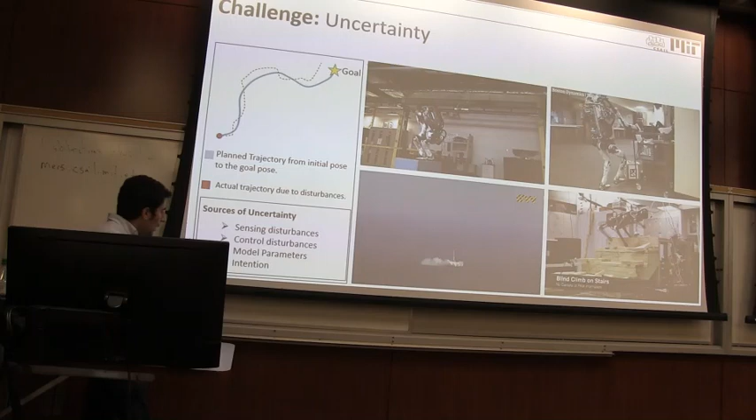Even if we have perfect information about the environment, even if we have perfect sensors and precise models for robots, the intentions of other players are uncertain to us. For example, when we are planning for autonomous vehicles, the intentions of other vehicles are uncertain. Their future behavior, their future actions are uncertain to us. So we need to deal with these kinds of uncertainties when we are planning for robots and autonomous systems.

In general, we have two sets of techniques to deal with uncertainties. First, robust approaches, and next, risk-bounded, or in general, risk-aware techniques. In robust approaches, we need to look at the uncertainty set. We need to look at the range of uncertainty and make sure that the obtained plan is valid for all possible values of the uncertainties. Let's see how it works.

For example, consider this simple example. In here, the goal is to drive the robot to the goal region, and we have a TurtleBot that plays the role of obstacle. In this problem, we don't have any uncertainties, so we can call any path planning algorithms like RRT star, or PRM, or trajectory optimization techniques to construct a path to the goal.

Now, let's look at the next scenario. In this scenario, the TurtleBot plays the role of a moving obstacle, and its location is uncertain. We only know that the robot moves between these two given points in the room. Now, to construct the robust path, we need to look at the uncertainty set, which here is the interval that shows the location of the robot.

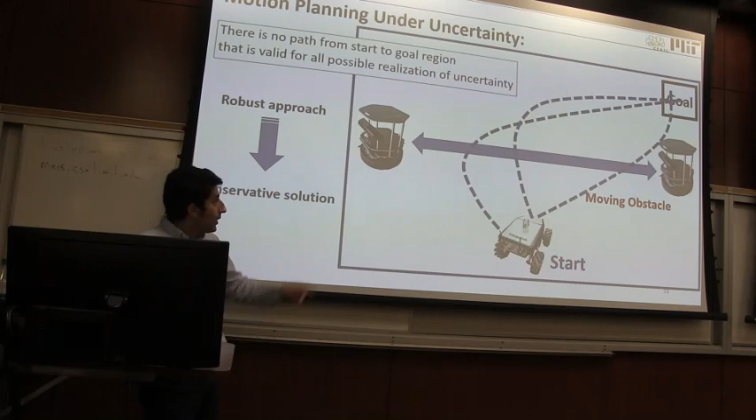So no matter how we construct the path, we can always find a value for the uncertain parameters, or a location for our obstacle that collides with our path. So from the robust techniques point of view, this problem is infeasible. And even worse, if we replace this TurtleBot with a real turtle that takes 10 days to get to this part of the room, still from the robust techniques point of view, this problem is infeasible. Because we can always find a location for our uncertain obstacle that collides with the constructed path.

So in general, robust techniques result in conservative plans and conservative solutions. Now the question is how we can avoid these conservative plans. How should we fix our reasoning?

Include timing? Maybe. I mean, if you can predict.

So we don't have any information about our uncertainties. So if we have a model or time-based model, we can do an exact prediction. But here, we are only given some uncertain set. So to avoid this conservative solution, we are going to use risk-bounded techniques.

So based on risk-bounded techniques, instead of looking at the uncertainty set itself, we are going to look at the frequency of the uncertainty. How frequent is it to observe these obstacles in this part of the room? And frequency of the uncertainty is nothing but the probability distribution of uncertainty.

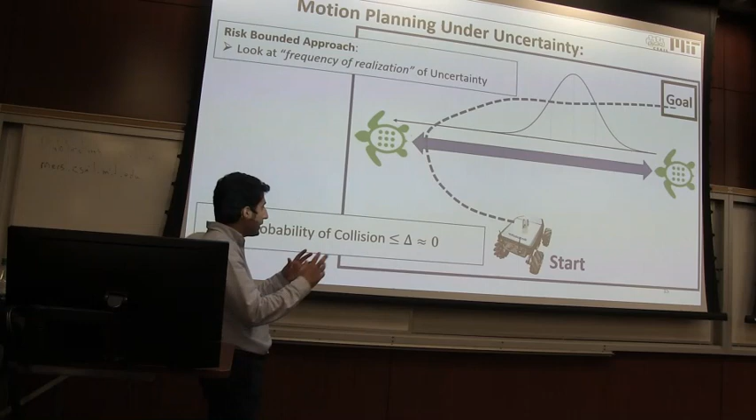In the risk-bounded techniques, we are looking for plans to make sure that the probability of failure is always bounded by a predefined value delta. We call this delta an admissible risk bound. Or equivalently, we are looking for plans whose probability of success is greater than a predefined value 1 minus delta. This is how we want to guarantee success in stochastic frameworks.

So this is the plan, and this plan, for example, is going to work 90% of the time. So probabilistic reasoning and probabilistic guarantees. In general, robust techniques versus risk-bounded techniques is about possibility versus probability. In robust techniques, we either fail or succeed. 0 and 1, we have 2 outcomes.

But on the other hand, in risk-bounded techniques, not only can we succeed or fail, but also we can design the degree of this failure or success. So we receive 0, 1, and whatever is in between. So mathematically speaking, we have more freedom, we have more options to design the plans. And this will result in less conservative plans for our robots.

Okay, so let's now look at the mathematical formulation of the risk-bounded techniques and some challenges that we are going to face. So in risk-bounded motion planning, we are usually given a model of the robot. So we usually have a continuous state space model. In this model, the vector x describes the states of the robot. For example, these states could be location, velocity of a vehicle, or joint angles and angular velocity of a walking robot or a manipulator.

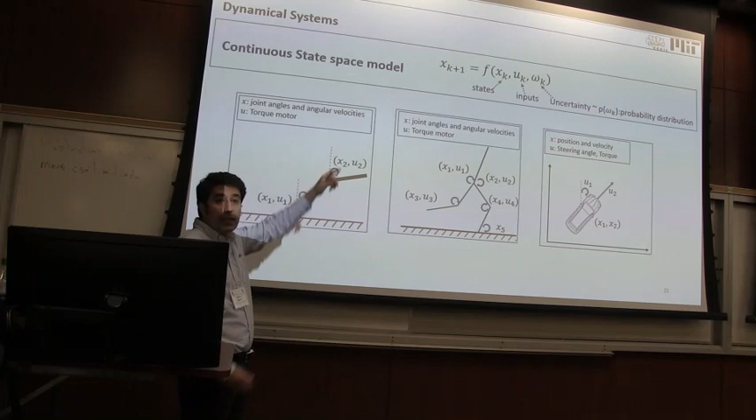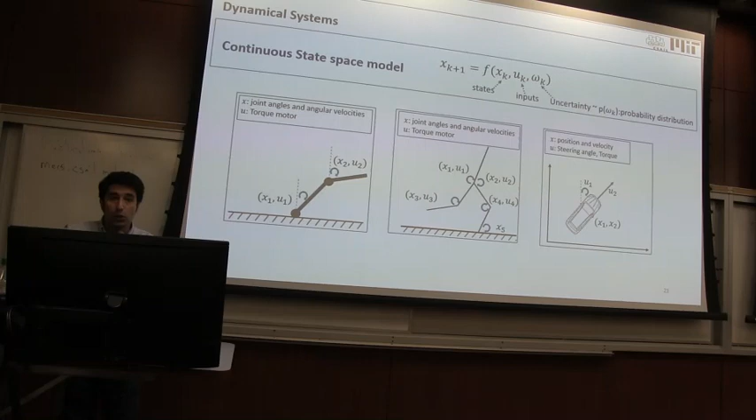So given this model, and given the current states and the current control inputs of the robot, we can predict the states of the system at the next sampling time. We are modeling uncertainty with the uncertain parameter omega. Omega has some probability distribution that captures all disturbances of the system. Also, we are given a description of the safe set or unsafe set in the state space. For example, a description of the obstacles or of the safe regions in the environment.

Now, given this definition, we define risk at time k as the probability of failure, the probability that the states of the system at time k collide with obstacles, or equivalently, the probability that the states of the system at time k don't belong to the safe region.

Now, given these descriptions and the model of the robot, in risk-bounded planning, we are looking for control inputs over a planning horizon T such that we drive the robot from the given location to the goal region in the state space with respect to probabilistic safety constraints. At each time k, the probability of collision, the probability of failure, should be bounded by a predefined value delta k, or equivalently the probability of success at each time k should be greater than a predefined value 1 minus delta k.

In this talk, I assume that we are given this risk bound. This morning, Ono talked about risk allocation techniques to come up with this admissible risk bound. We can apply these techniques and, at each time k, decide this risk bound. But in this talk, I assume that these delta k's are given.

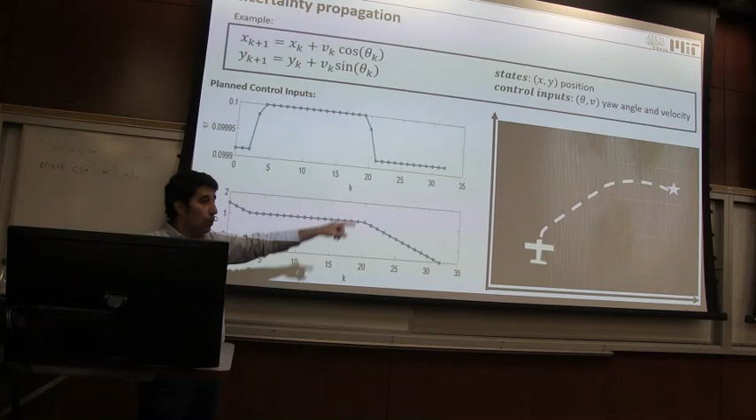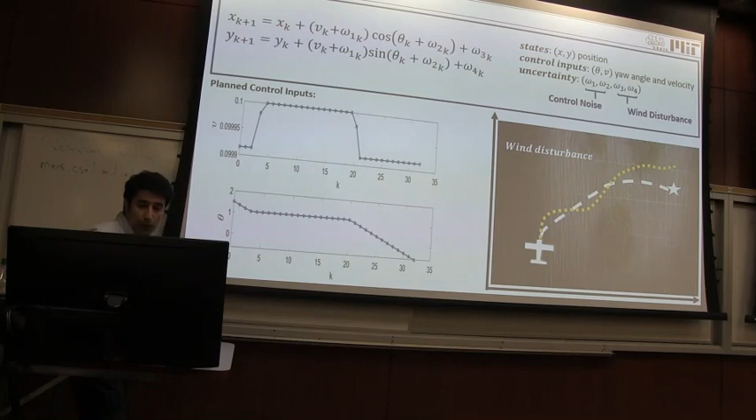Here we are given a nonlinear model of a plane and also nominal trajectories and control inputs. In absence of the uncertainty, if we apply these nominal controllers, the plane will follow the given trajectory to the goal point. Now, in presence of uncertainties, like wind disturbances, the plane is going to deviate from the given nominal trajectory. If we repeat this process over and over again, each time we are going to see different trajectories for the plane. A family of trajectories that represent the location of the plane in the environment.

If we look at these trajectories at different time steps, we are going to see such patterns at each sampling time k. These patterns are different realizations of uncertain states or different realizations of random variables. We can use numerical techniques to find the probability distributions that describe and explain these sample points in the environment. So this shows that since we have probabilistic uncertainties in the dynamics, the states of the dynamics are also probabilistic and have some probability distribution.

And to be able to address risk-bounded planning, we need to model and represent this probability distribution. But in general, this is a challenging problem, so we don't have any analytical solution to find these probability distributions for any arbitrary model of the robot. So the first challenge is uncertainty propagation: how we describe and model this probability distribution of the state at each sampling time k.

The next challenge is estimating the probability of collision. So from the definition of the risk, we need to find this probability that the state at time k collides with the obstacle. And from the definition of probability, we need to deal with these integrals. Here we have a multivariate integral with respect to the probability distribution of states defined over the region of obstacles. Again, in general, we don't have any analytical solution to calculate this integral.

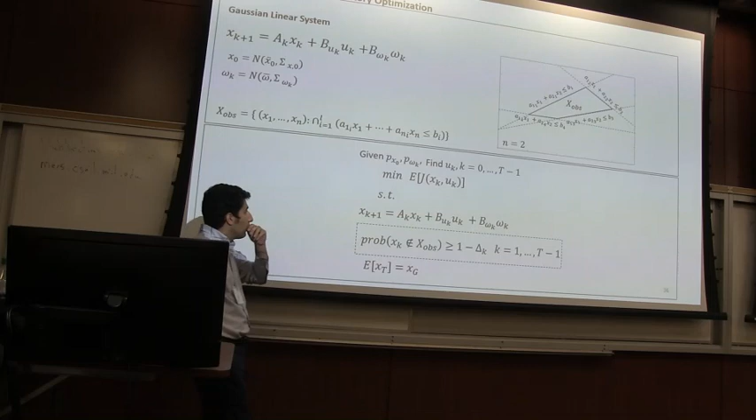So in this problem, we are given a linear dynamics with additive Gaussian uncertainty. Also, the initial distributions are Gaussian. We are also given a linear safety constraint, a linear description of the obstacles or a linear description of the safe region. And we are interested in this problem. We are looking for the controllers to minimize the cost function with respect to this probabilistic safety constraint. At each time k, probability of no collision with the obstacle or probability of remaining in the safe region should be greater than 1 minus delta k.

Now, if we look at this linear system, this Gaussian linear system, at each time k, the states of the system are going to have a normal distribution. We have a linear dynamics with initial Gaussian distribution with a Gaussian additive noise. So if we do the uncertainty propagation and look at the distributions of the states at each time k, we are going to see a normal distribution. Why is this true? Why do we always observe the normal distribution? Any? I mean, linear transformation of a Gaussian remains a Gaussian.

Right, exactly. So sum of two normal random variables results in another normal random variable, and this is exactly what this linear system is doing. At each time, it is summing a bunch of normal random variables and generating another random variable at the next sampling time. So in the uncertainty propagation step, we just need to model the probability distribution with the Gaussian, and we need to only describe their mean and covariance. At each time k, we can write the mean and the covariance of our uncertainties based on the parameters of the dynamical system as here. So these two equations describe the evolution of the mean and the covariance of the probability distribution of the states along the trajectory.

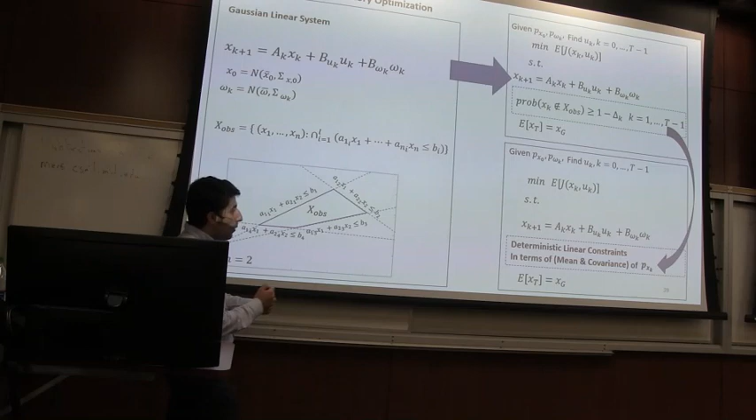Now, in the next step, since we have linear safety constraints, we can replace the chance constraint, probabilistic safety constraint, in terms of a deterministic linear constraint, in terms of mean and the covariance of the probability distributions of states. So as a result, we can transform probabilistic optimization into a deterministic optimization. Here we have a linear constraint, and these new constraints, based on mean and covariance, are going to add some safety margin around the obstacles. The size of the safety margin depends on the covariance of the distribution of the states. So to satisfy this chance constraint at time k, the mean of the probability distribution of the state should remain outside of this safety margin. So this is how we

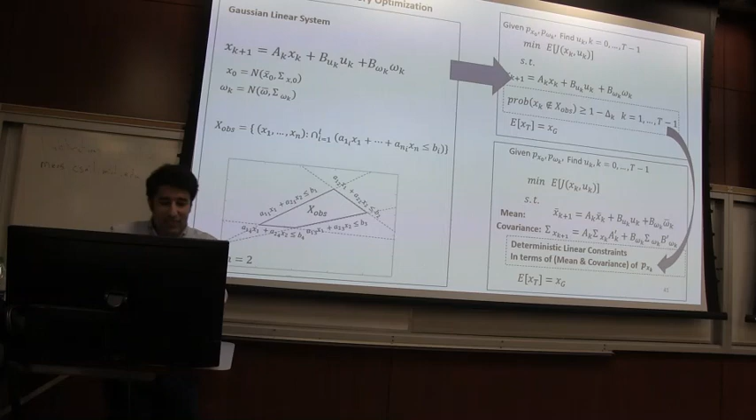assure safety. So the key point here is to describe the probability distribution based on the normal distribution and represent it with mean and covariance, and then replace the chance constraint with a new deterministic constraint in terms of mean and the covariance of the states. This formulation is based on optimization techniques. We can use the key results in different formats. For example, we can come up with risk-bounded RRT star.

So in RRT star, we are looking for a growth tree. So when we are building this tree, at each node, we need to propagate the uncertainties and construct the Gaussian distribution for each node, and then calculate the risk by just looking at the deterministic linear constraint in terms of the mean and the covariance of distribution. And this is how we can find the risk of each node. And by looking at this risk, we can construct risk-bounded paths inside this tree to the goal.

Or another format is risk-bounded PRM. So we can construct a graph in the environment. Then we can propagate the uncertainties, which are normal distributions, along each edge. And then we can assign the risk, probability of collision, for each edge. And then we can call any graph search techniques to construct the risk-bounded paths. For more information about techniques, you can look at the FIRM paper.

Or we can even construct risk-bounded motion primitives. In offline mode, we can design the different maneuvers for the vehicle, and then in real time, we can propagate our uncertainties, which are the families of the normal distribution along each maneuver. And we can calculate the risk by looking at the linear constraint in terms of the mean and the covariance of the distribution, and then pick the right maneuvers that satisfy our risk-bounded constraints.

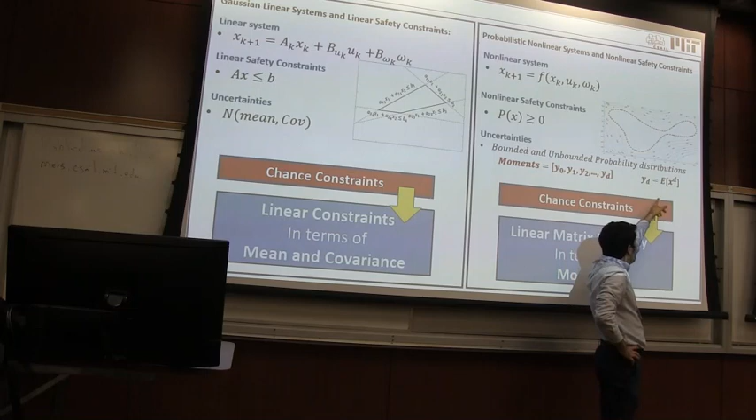Now, in such setup, instead of representing the distribution by only mean and covariance, I'm going to represent the distribution by higher order statistics called moments. So moment of order d of a random variable is defined as expected value of x to the d. So we will see that moment of order 1 and 2 are nothing but the mean and the covariance of the distribution. So here, instead of using mean and covariance, I need to use higher order statistics because we are not going to see a normal distribution because of the nonlinearities.

So to be able to represent arbitrary distributions, I'm going to use a vector of moments. And then, instead of replacing the probabilistic constraints in terms of linear constraint, in terms of mean and the covariance, I'm going to replace the nonlinear probabilistic constraints in terms of linear matrix inequality in terms of the moments. Linear inequalities versus linear matrix inequality. These constraints are also convex, and we can efficiently solve them using convex solvers.

So this is the main overview of the techniques. We are going to represent a distribution by set of moments and then replace the probabilistic constraints with linear matrix inequality. What's the difference between linear and matrix? Yeah, what's that? Yeah, we will see.

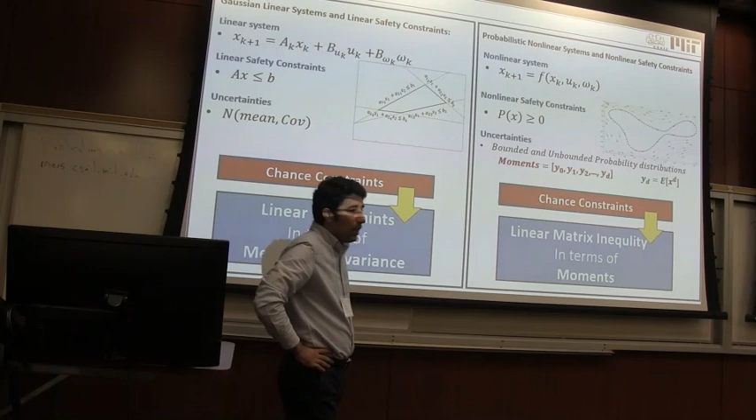So, to be able to address the risk-bounded nonlinear plannings, I'm going to define two general frameworks. One is chance optimization, and the second one is chance constraint optimization. In chance optimization, we are looking for design parameters to maximize the probability of success. So what is success? It comes from the nature of problem. So I only assume that success is a nonlinear function of design parameters and uncertain parameters.

Like, this success could be reaching to the goal region or avoiding obstacles, or even it could be maximizing a profit in a trade. So these formulations are general, and we can reformulate many different problems in different domains as a particular case of these probabilistic optimizations.

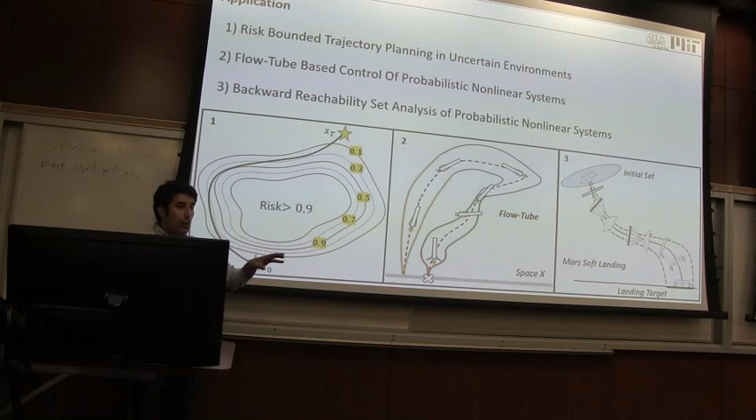So in the first problem, we are going to address risk-bounded trajectory planning in uncertain environments. In this problem, we have probabilistic obstacles. So, for example, the location, size, and geometry of obstacles are uncertain, and we want to find a risk-bounded trajectory to get to the goal point from the initial point. For this, we are going to construct a new map that we call a risk contours map. This map represents the risk of different points in the region, so we can use this map to construct our trajectory to the goal.

The next problem, we are going to look at nonlinear controller design for probabilistic nonlinear systems using the concept of flow tube. So the goal here is to find nonlinear controllers to follow the given trajectory and make sure that the robot stays in the neighborhood of the trajectory despite all uncertainties. We call this neighborhood a flow tube. So this is how we are going to ensure safety, and we can see this kind of reasoning in SpaceX

line systems. In the last problem, we are going to look at reachability analysis of probabilistic nonlinear systems with application in autonomous systems and Mars soft landing problems. So let's first see how we can solve this problem efficiently. To solve these problems, I'm going to leverage these tools: convex optimization, moment theory, and polynomials.

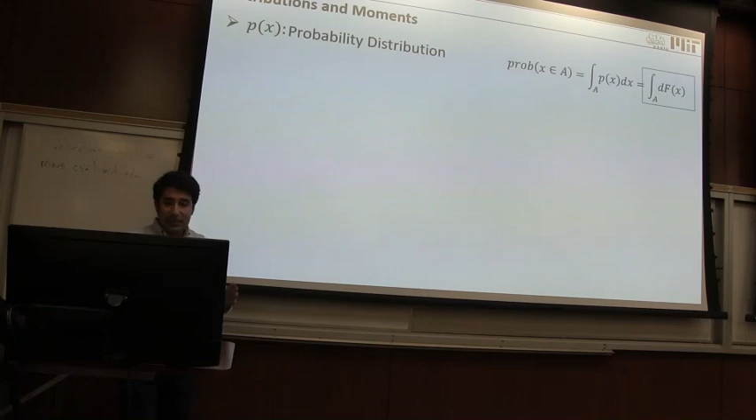So the next tool is the moment. Given a probability distribution of a random variable x, we can use this integral to calculate the probability of collision. In this talk, I'm going to use two concepts for probability distributions. One concept is the support set of the distribution. The support set is nothing but our uncertainty set, a set that our distribution is defined upon.

For example, here we are given a uniform probability distribution defined over the interval A and B. The support of the distribution is that interval A and B. Or in the case that we are given a delta distribution, it is defined over one point x star. So the support of this probability distribution would be that point.

I'm going to use this delta distribution when I'm solving the chance optimization problem. So given a deterministic point x star, we can always assign a delta distribution to that point. And given a delta distribution, we can always extract the point by looking at its support. One point and a delta distribution defined on top of it.

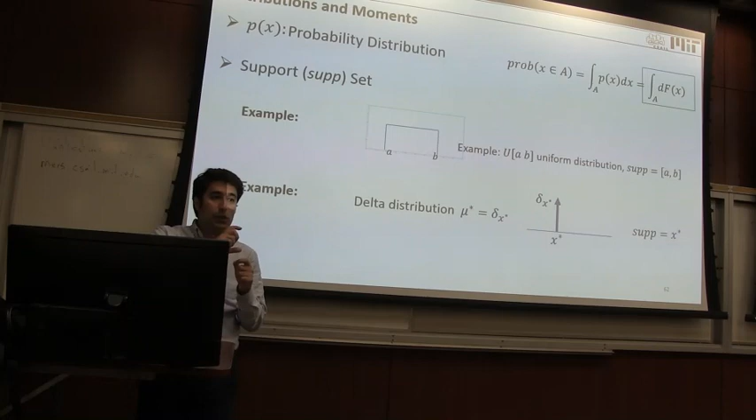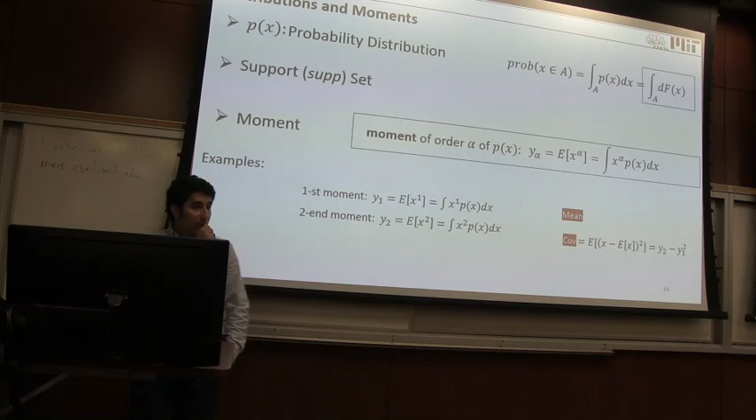The next concept is the moment. The moment of order alpha of a random variable x is defined as the expected value of x to the alpha. So for example, the first moment is the expected value of x, and this is nothing but the mean. And the second moment is described here, power of 2. And from the definition of the covariance, we can describe covariance in terms of the first and second moments. So mean and covariance are nothing but the first and second moments.

And also another important moment is the zero order moment, which is the expected value of this term. And this is called the volume of the distribution.

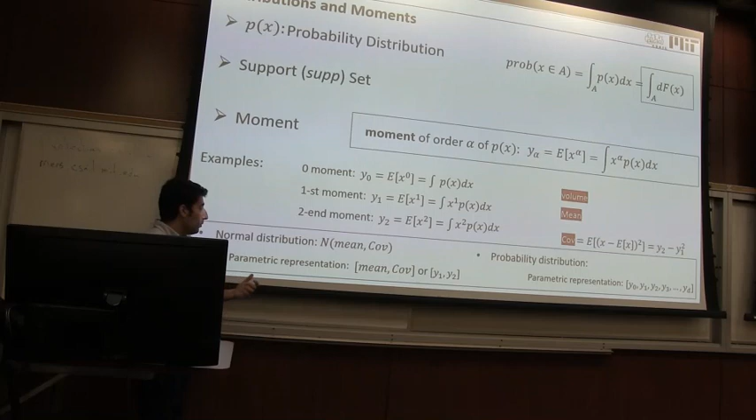Now, throughout this lecture, I'm going to use the sequence of moments to represent the probability distribution. We saw that in the linear case, we use the normal distribution and represent the distribution with mean and covariance, which are nothing but the first and second moments. But here, since we are going to have arbitrary distributions, I'm going to use not only the first two moments, but also higher order moments up to some finite order d.

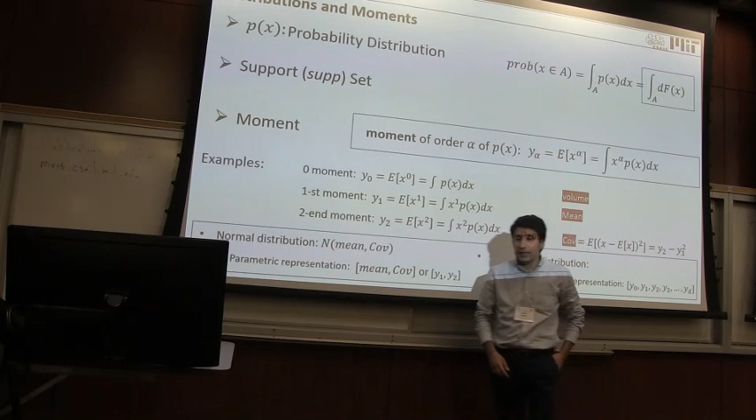So the last tool would be a polynomial. In general, polynomial functions are linear sums of powers of x, or monomials. Here we are seeing a one-dimensional polynomial in terms of variable x1, and here we are seeing two-dimensional polynomials in terms of x1 and x2. Polynomials in general are important because we can approximate any arbitrary continuous function in terms of polynomials.

In this talk, I'm going to use polynomials to represent my sets: safe set, unsafe set, or sets that describe the success. For example, here we are seeing a circle-shaped obstacle described by the level sets of this polynomial. And here we have uncertain obstacles.

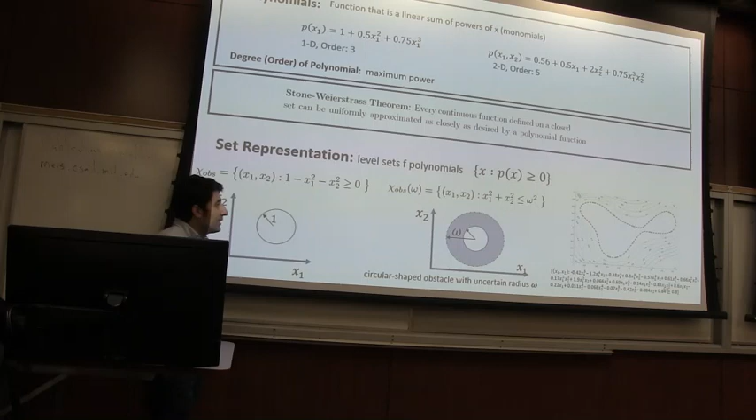We have a circle-shaped obstacle with uncertain radius omega, as described here. The omega is uncertain, so here we are seeing a probabilistic uncertainty in the size of obstacles. This omega could change based on some distribution. And in general, we can represent any non-convex and complex set by the level sets of polynomials, as here.

Now, as I said, I'm going to use moment techniques and polynomials to find a semi-definite linear matrix inequality representation of the original chance optimization. Since this is convex, I can solve it efficiently. And then in the next step, I'm going to look at the dual problems and solve the chance constrained optimization.

Let's look at the chance optimization. As I said, in chance optimization we are looking for the design parameters to maximize the probability of success. In this problem, we have two sets of parameters: design parameters x and uncertain parameters q with known probability distribution mu q. And this polynomial p describes our success set. So we are trying to maximize the probability of success.

So the main idea is, instead of looking for design parameters x, I'm going to look for its probability distribution. And what do I mean by this? I'm going to treat x, the design parameters, as a random variable. I'm going to assign an unknown probability distribution to my design parameters. Once we do that, we get parameters x with unknown probability distribution and a set of parameters with known probability distribution.

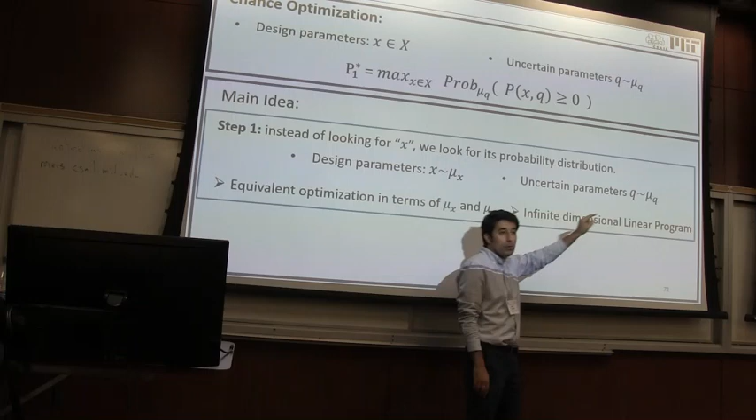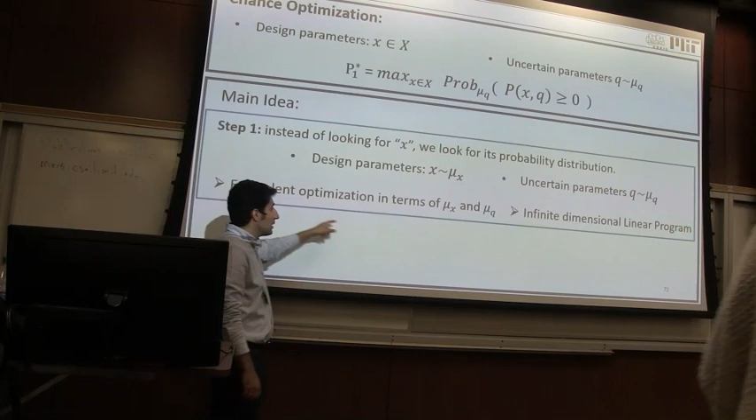So I'm going to reformulate the chance optimization in terms of these distributions: the unknown distribution of x and the known distribution of the uncertainties. As a result, I'm going to reformulate the original chance optimization in the probability domain in terms of mu x and mu q. And this will give me an infinite dimensional linear program, a convex optimization.

Then once we solve this, from the obtained distribution we are going to extract the true solution of the original problem.

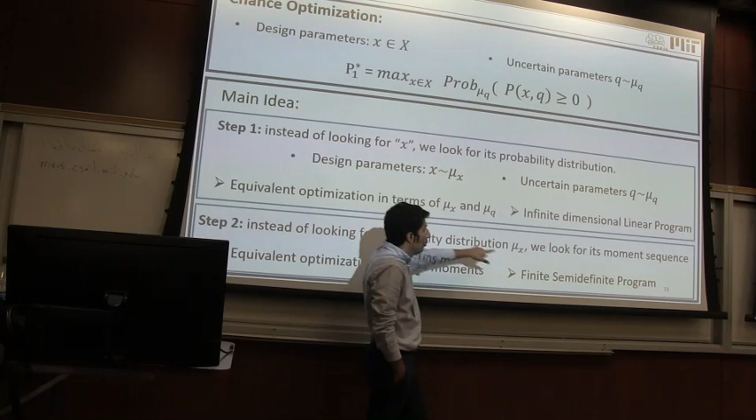In the next step, instead of looking for the probability distribution, I'm going to look for a moment sequence of the probability distribution. I'm going to reformulate everything in terms of the moments of probability distribution mu x and moments of probability distribution mu q, and this is going to give us finite semi-definite programs, a finite convex optimization that we can solve efficiently to find the solution of the original chance optimization. So first, let's look at step one.

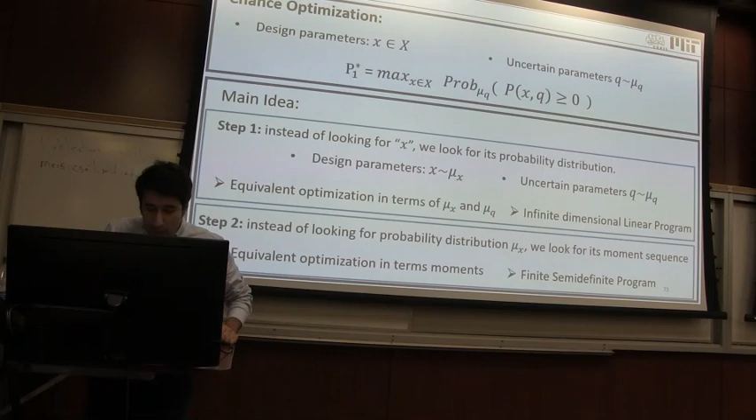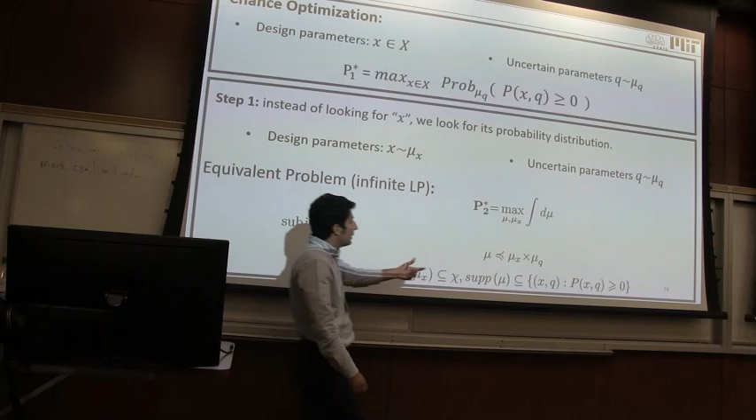So once we assign the unknown probability distribution, from the definition of the probability and the integrals that appear inside the definition of probability, we can find a new optimization in terms of the distribution as here. So in this problem, we are looking for an unknown probability distribution of the design parameters mu x, and also a slack distribution to maximize this linear cost with respect to linear constraints.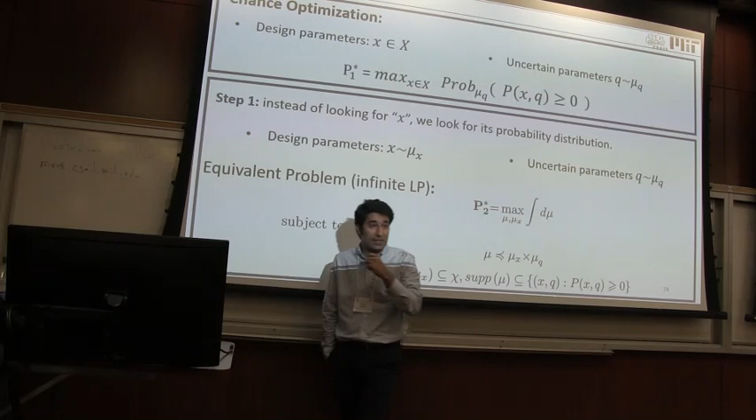The support of the measure mu x should be in the space of my design parameters, and the support of the distribution mu should be in the set that describes my success. This is a linear program, and we can show that these two problems are equivalent: the original problem of chance optimization, and the new problem that is described based on the probability distribution.

These two problems are equivalent, and if x star is a solution of the original chance optimization problem, the optimal solution of the problem in the distribution space is going to be a delta distribution defined over the solution of the chance optimization. So by solving this problem, we can get delta and look at its support and construct the true solution of the original problem.

So although here we have a linear program in terms of distribution, the size of these distributions is infinite. So to be able to solve this optimization, in the next step, I'm going to reformulate the cost and constraints of this optimization in terms of the moments of distributions mu x, mu, and mu q. For this, I'm going to use standard results on the relation of distribution and moments.

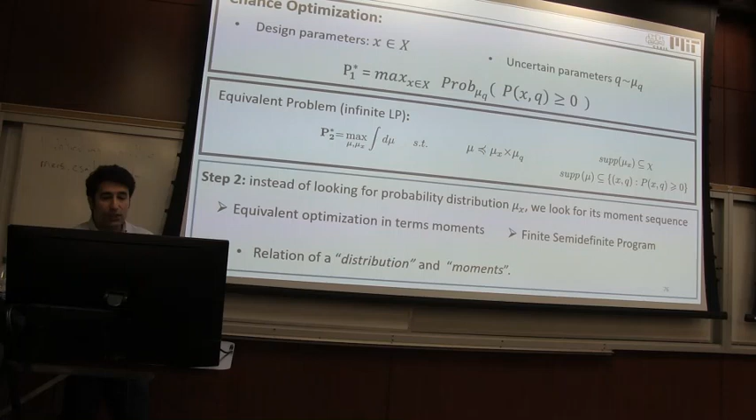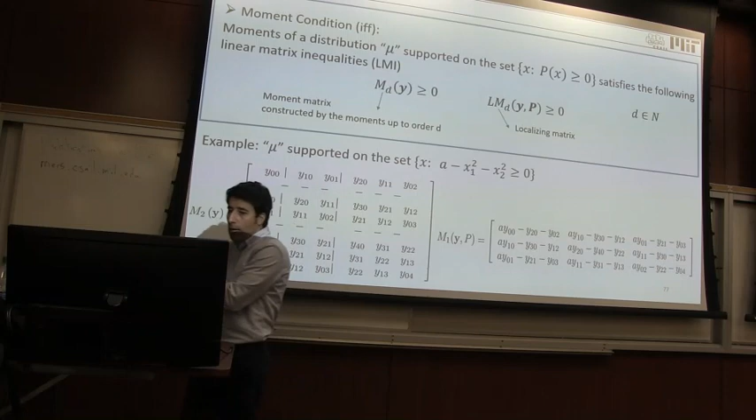So using this linear matrix inequality, we can translate the problem in the distribution space into the moment space. Instead of looking for distributions, I'm looking for the moments, and I'm using the relationship between the moments and the distribution to translate these constraints. So here we have linear matrix inequalities based on the moments of the distributions.

So this greater than or equal to 0 here means in terms of the semi-definite matrix. Yeah. But on the left, what is it? So this part? Yeah. So this means that this probability distribution should be bounded by this everywhere. Yeah. Okay.

So we can show that by solving this finite semi-definite program, as I increase the size of matrices, or as I use the high order information of the moments, we are going to get the moment sequence of the optimal probability distribution that's a solution of our problem defined in the distribution space. So instead of solving chance optimization, I'm going to construct the semi-definite program in moments and get the moments, and that moment sequence represents this distribution, whose support is our true solution.

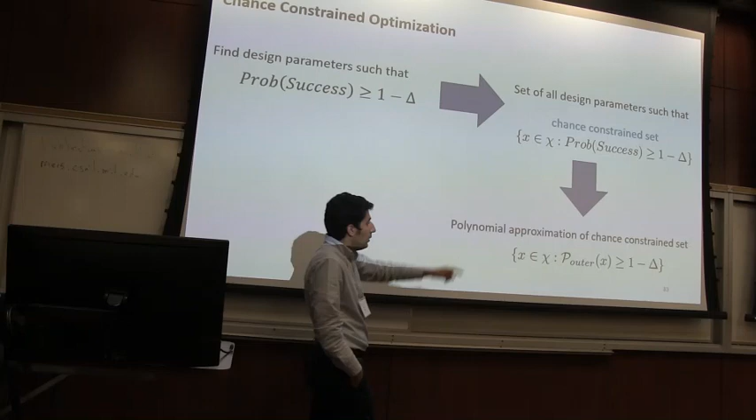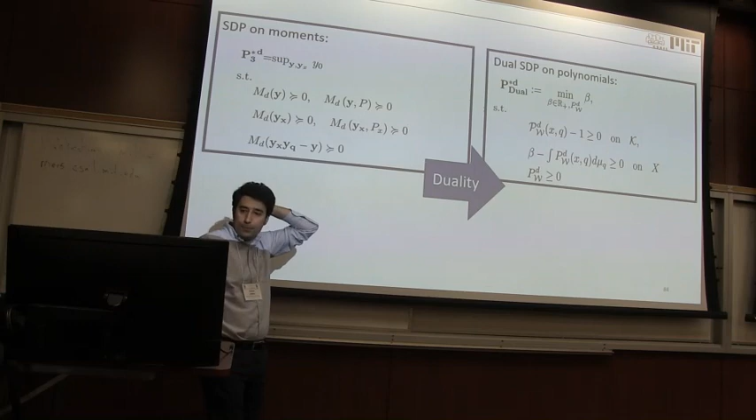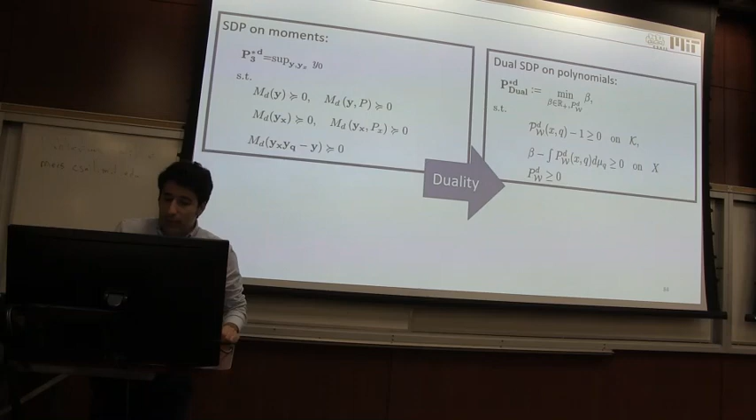For any point inside this set, the probability of success is guaranteed to be 1 minus delta. And to find this P-outer, I'm going to look at the dual problem. So this is our finite semi-definite program constructed in the moment space. By applying the standard duality results of semi-definite programs, I'm going to get a dual semi-definite program, this time in terms of the polynomials. Then the output of this dual semi-definite program is a polynomial that I call a P-outer.

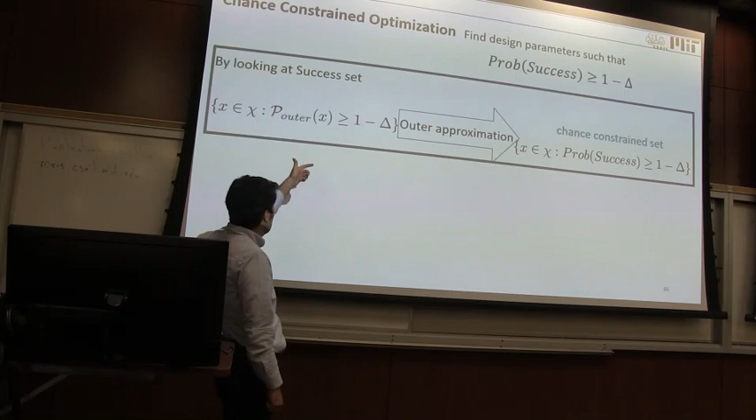Then we can show that for any given design parameter x star, this P-outer represents an upper bound approximation of the probability of success for that design problem. So as a result, I can use this polynomial level set with respect to the P-outer to come up with the outer approximation of my chance constraint set. So by looking at the dual problem of the SDPs and also looking at the polynomial description of the success set, I can come up with the outer approximation of the chance constraint set.

And we can also find the inner approximations by looking at the complement set, which is the failure set. So as a result, by solving the dual semi-definite programs, we are going to get two polynomials, p-outer and p-inner, such that the level sets of these polynomials describe our chance constraint set. And this is nothing but polynomial approximation of the chance constraint. I'm replacing the probabilistic constraint in terms of deterministic polynomials.

So let's wrap up this section. As a summary of what I did to solve chance optimization: the goal was to reformulate the nonlinear chance optimization as a semi-definite program. And to obtain the semi-definite program, instead of looking for design parameters, I assigned an unknown probability distribution to my design parameters. And I reformulated the original chance optimization in terms of the probability distribution.

And then to be able to solve this new problem, instead of looking for the distribution, we looked at the moments of the distribution by applying the standard results of the moment theory. And this gives us this finite semi-definite program for which we can call efficient solvers or packages like GloptiPoly to solve this SDP and find a solution of the chance optimization problem.

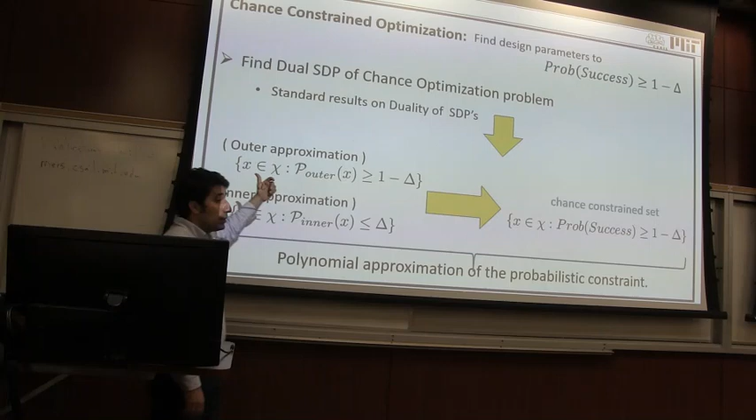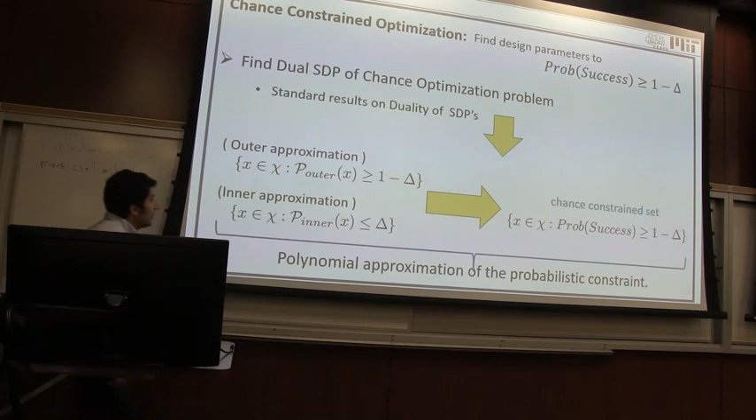And for the chance constraint optimization, we looked at the dual SDP of the chance optimization. Once we obtained the SDP for chance optimization, we applied the standard results of the duality of SDPs and found the dual problems. The output of that dual SDP is going to be polynomials P outer and P inner. And then we describe the inner and outer approximation of the chance constraints as here.

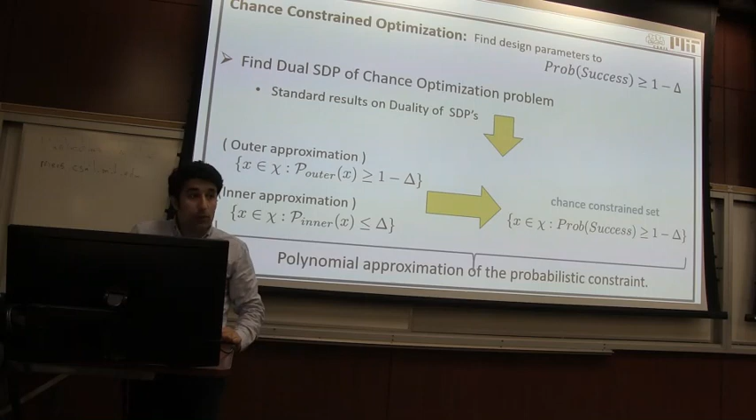Now let's see how we can use these results in control and risk-bounded planning. So the first application is risk-bounded trajectory planning in uncertain environments. In this problem, we have probabilistic uncertainties that come from the obstacles: uncertainties in location, size, and geometry of the obstacles in the environment. And the goal is to find the risk-bounded trajectory to control the robot.

Now in this setup, instead of working with an ordinary map that only shows free and obstacle regions, the goal is to construct a new map that represents the risk information of different regions in the environment. And we call this a risk contours map. So to construct such a map, I'm going to define the notion of delta risk contours, which is the set of all points in the environment whose probability of collision with these uncertain obstacles is less than or equal to delta.

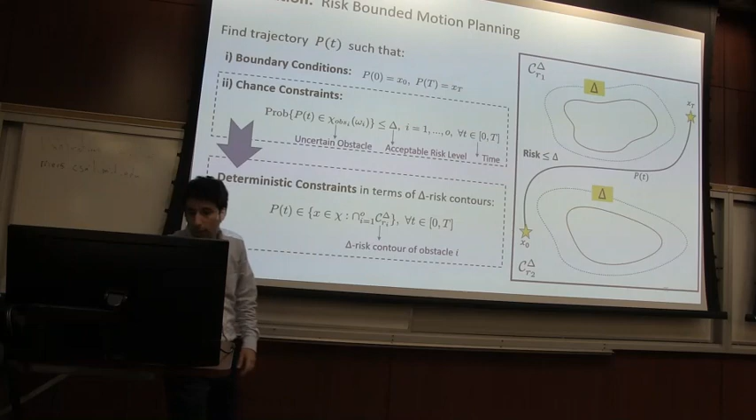Now, we can use this risk contours map for risk-bounded motion planning. In risk-bounded motion planning, we are looking for a trajectory P(t) to drive the robot from the initial state to the goal state, considering a probabilistic safety constraint. The probability of collision over the trajectory with each obstacle at each time step should be bounded by a predefined value delta, our acceptable risk level.

Now, we can replace this probabilistic constraint with a deterministic constraint in terms of the delta risk contours of the obstacles. And as a result, since we have deterministic constraints, we can call any motion planning algorithm like RRT star or PRM to construct our trajectory. We only need to make sure that the obtained trajectory is always outside the delta risk contours of the obstacles.

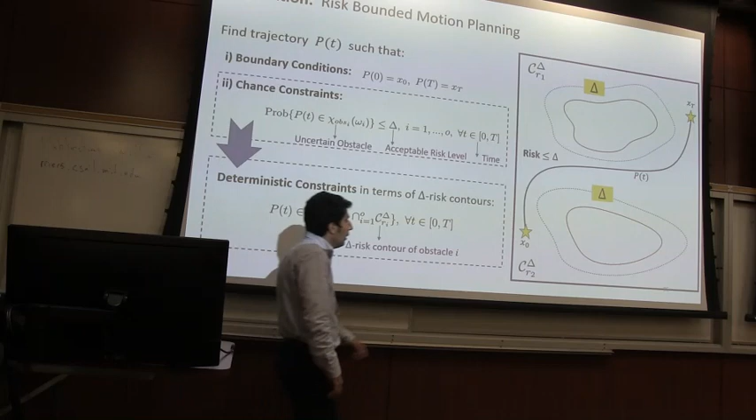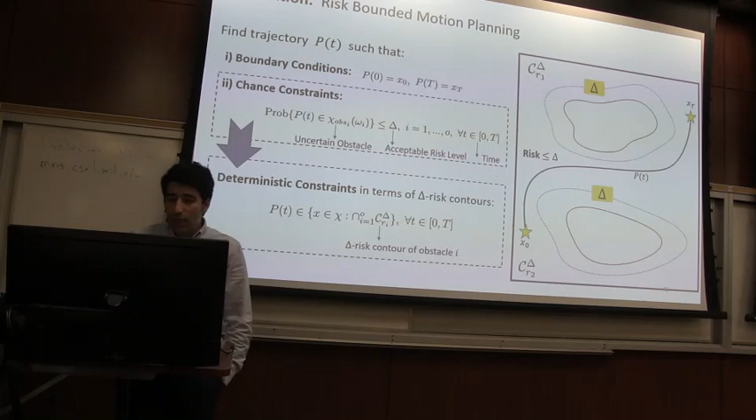For example, here we are seeing the delta risk contours of each obstacle. Outside these contours, the risk of collision with these obstacles is less than delta. Now, to construct these delta risk contours, from the definition of the delta risk contours, which is the set of all points whose risk is less than or equal to delta, we need to deal with this probabilistic constraint. The probability of collision should be less than delta. And this is nothing but our chance constraint that we already saw.

So the design parameters are the points in the environment, and the success set is the remaining safe region. So as I described, we can replace the chance constraints in terms of polynomials by looking at the dual SDPs. So we are going to get a polynomial P inner by looking at its delta sublevel sets, a region where this polynomial is less than delta, which is this region. This region is going to describe the inner approximation of the delta risk contours. In any point in that region, the risk of collision with uncertain obstacles is less than delta.

And also for the outer approximation, we are going to get a polynomial P outer by looking at the super 1 minus delta level sets. The region where the polynomial is greater than 1 minus delta. This region is going to represent an outer approximation of the delta risk contours.

Is the number of moments that you have related to the degree of the polynomial that you'll get? Yeah, exactly, it's the same. So in the original SDP, where we are looking for moments of order D, when we are finding the dual SDPs, we are going to look for polynomials of order D. That's how they are related.

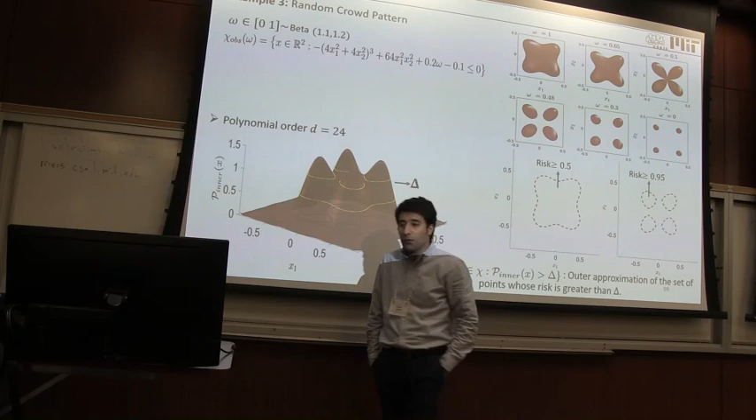And similarly, this is a set that probability of collision is greater than 95%, or equivalently, this is a pattern that we are going to observe with the probability of greater than 95% for that random crowd. So for more information, you can look at our recent RSS paper on this topic.

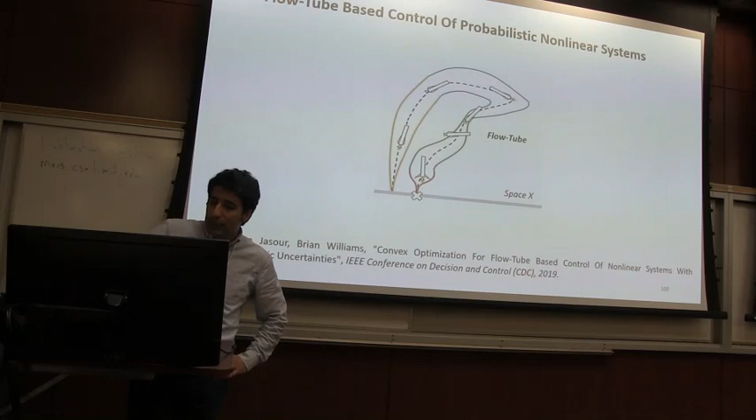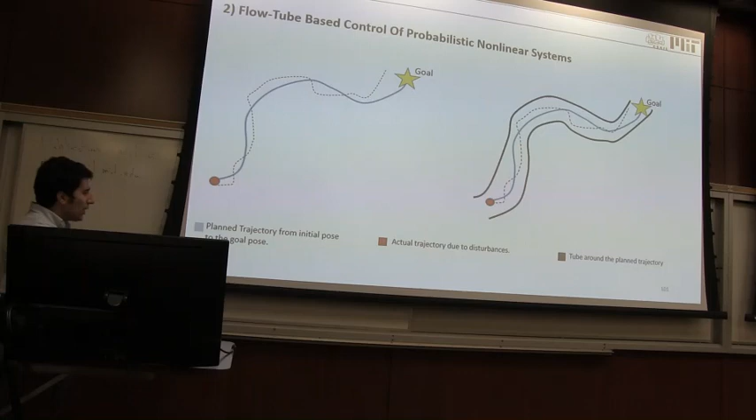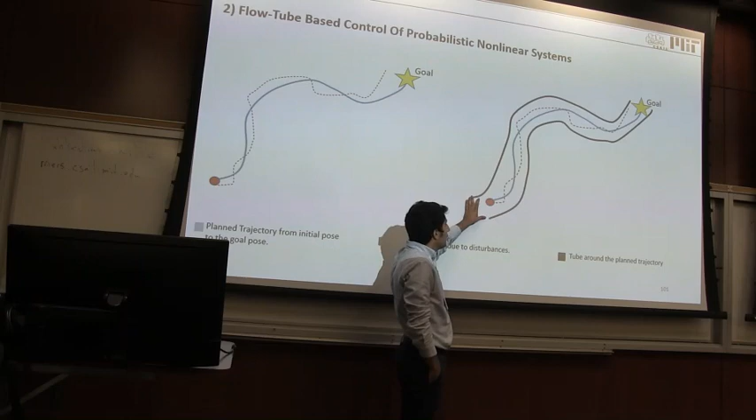The next problem is designing nonlinear controllers for probabilistic nonlinear systems. So in this problem, as we saw, in presence of uncertainties, the trajectory of robot is going to deviate from the design trajectory. So the goal here is, while we're tracking the nominal trajectory, we want to make sure that the trajectory of the robot always remains in the neighborhood of the planned trajectory. And we call this neighborhood a flow tube.

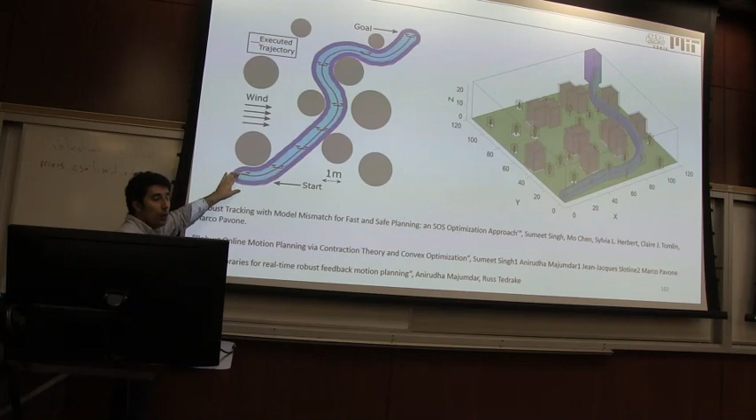So by doing so, for safety, we only need to make sure that the flow tube is obstacle-free. Although the drone is going to deviate from the planned trajectory, since we know that it's always going to remain inside the flow tube, for safety, we only need to make sure that this flow tube is obstacle-free.

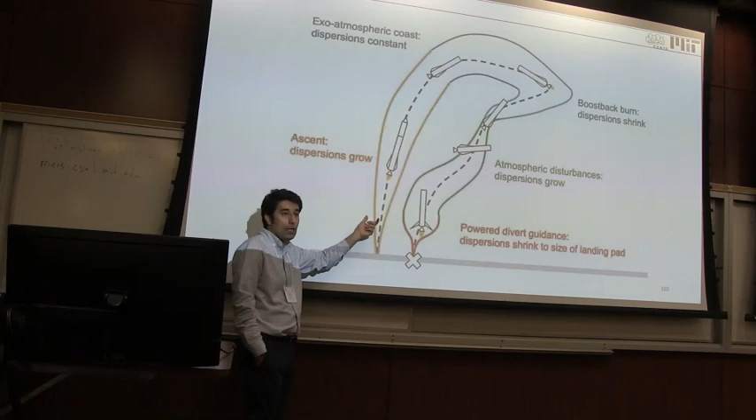We can also see a similar reasoning in the SpaceX systems. So we can design trajectories and associated funnels for different steps of the mission. And then we need to design a controller to make sure that the system follows the nominal trajectories and always remains inside this flow tube despite all uncertainties and disturbances.

Now I'm going to formulate this problem as a chance optimization. So in this problem, we are given a continuous nonlinear state space model, and also we are given nominal trajectories, x star and u star. In the absence of uncertainties, if we apply nominal input u star, the robot is going to follow this nominal trajectory. This happens when we have no uncertainties.

Then I define the flow tube, as I said, a neighborhood around the nominal trajectory x star. I describe these flow tubes at each time k with polynomials. For example, it could be circle-shaped flow tubes. At each time k, we are going to see a circle with the radius of epsilon that describes my neighborhood and my flow tube at time k.

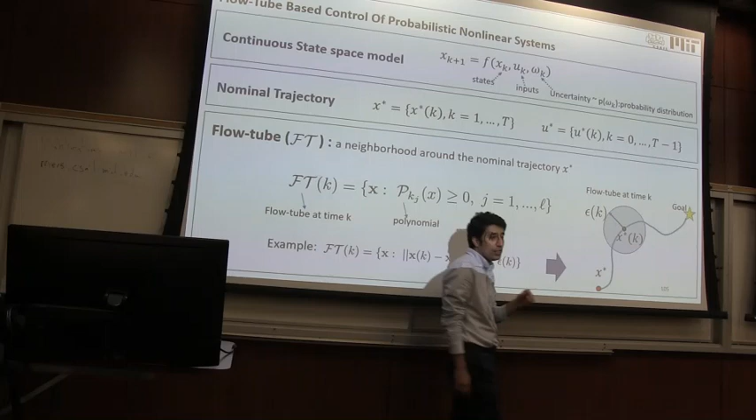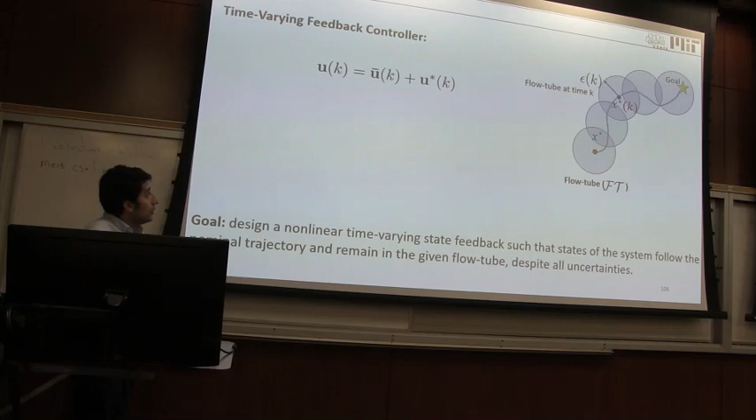So what is the goal? Designing a time-varying nonlinear feedback controller, u_k, such that the trajectory of the robot follows the given nominal trajectory and always remains inside these defined flow tubes. So I assume that my controller has a polynomial structure. u star is a given nominal controller, and I assume that u bar is a polynomial state feedback in terms of the error signal.

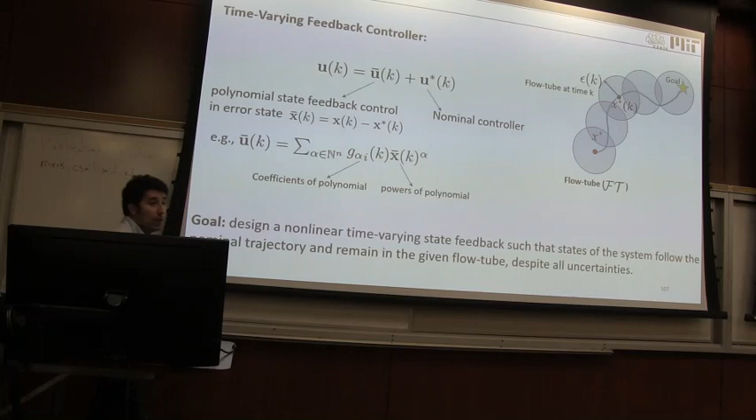So when we want to design, we are going to look at the coefficients of this polynomial feedback. This is what I mean by designing: we look at the coefficient polynomials that describe our nonlinear state feedback controllers. So we can reformulate this problem as a chance optimization problem. What is success? States should follow the given trajectory and remain inside the flow tubes. What are the design parameters? The parameters of the controllers for all time steps.

And then use the approach that I just described: construct the semi-definite programs and solve the problems. But the problem is, I'm going to look for all the parameters of the controllers for all time steps. For long planning horizons, we are going to get a large chance optimization, and as a result, a large semi-definite program. And that semi-definite program can easily get intractable.

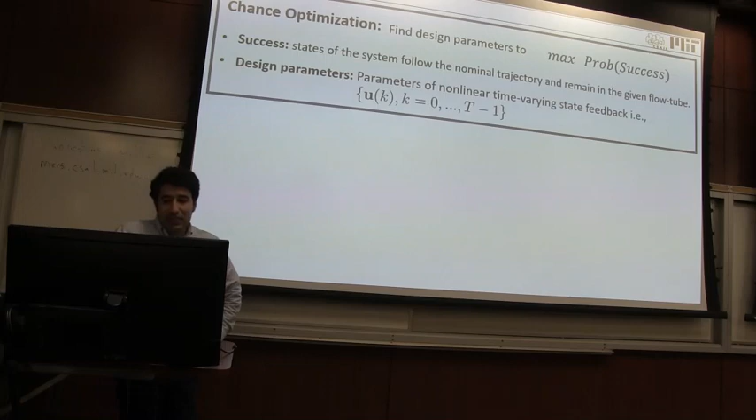So to avoid this, I'm going to use sequential chance optimization. I'm breaking the original chance optimization into a set of smaller chance optimizations. In this formulation, at each time k, I solve one smaller chance optimization to only find the parameters of u at that particular time k. Instead of looking for all controllers, I'm looking only for the controller at that time k. And what is success? I want to find this u_k such that the states at the next sampling time belong to our designed flow tubes.

For example, consider this example. So here we are at time k0. We are given the initial distribution of the states. This is our nominal trajectory. This is our flow tube at time k1. So we are looking for the controller at time 0 to maximize this probability that the states at time 1 belong to the flow tube. So one smaller chance optimization problem.

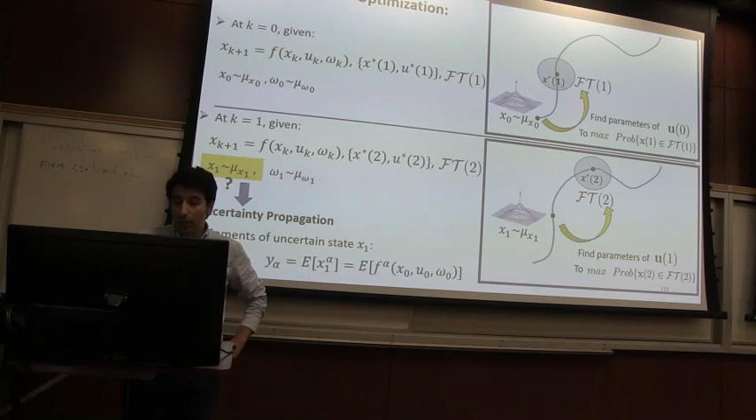Now we can repeat this process in the next step. Next step, we are going to look for the controller at time 1 such that the probability of states belonging to the flow tube in the next sampling time step becomes maximum. But in here, to be able to solve this chance optimization, I need the information of the distribution of the states. In the first step, the initial distributions are given. But in here, we have to calculate, or we have to propagate the uncertainties.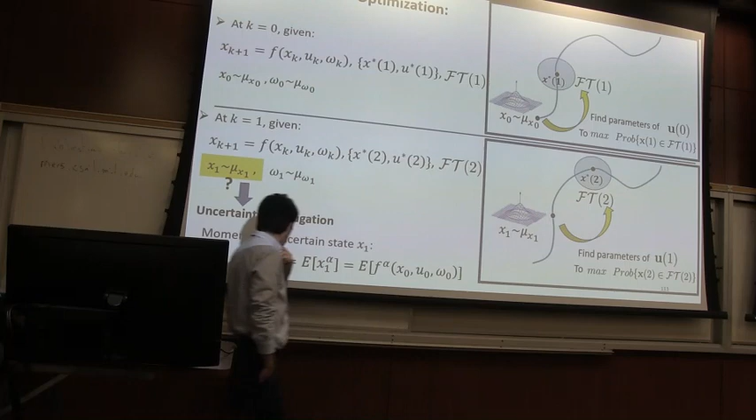So what I need is a moment description of this distribution. From the definition of the moments and dynamics, I can describe the moments at time 1 based on the moments of the distribution at time 0 and the controller that we just designed. So by doing the uncertainty propagation, we are going to find the moments of distribution of the state at time 1, and then we are going to look for a controller that maximizes this probability. So by repeating this process, we can design the nonlinear controllers along the trajectories.

We can actually do this in offline time. In offline time, we can design different maneuvers, for example, for a vehicle, and then design these tube-based controllers. And then by designing these controllers offline, in real time, to assure safety, I just need to make sure that these tubes are obstacle-free. So design everything offline and use the result in real time for safety.

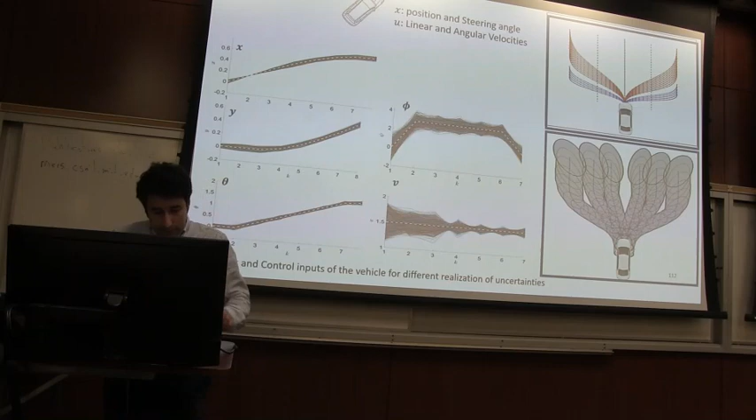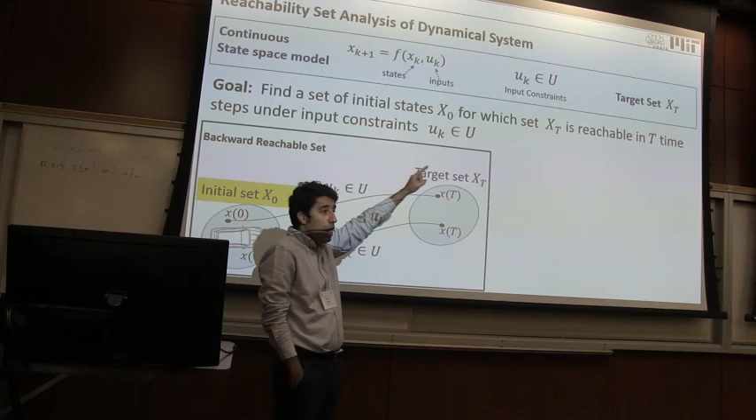The last example is about the reachability set of probabilistic nonlinear systems. This is how we define the reachability set for deterministic systems. In deterministic systems, we have deterministic nonlinear dynamics. We are also given input constraints. At each time k, inputs should belong to a set that represents our control constraints, and also we are given a target set, xt. Now, given these parameters, we are looking for a set of initial states, x0, for which that target set is reachable in t steps under the input constraints.

For example, consider this vehicle scenario. So we have the dynamics of the vehicle. We are given this target set. Also, we have these constraints. So this initial set, which is called the backward reachable set: for any point inside this set, there is a controller that satisfies our constraint and drives this vehicle into this set in t time steps. Note that here I only care about this set itself. We are not looking for the controllers. We just find a set of initial conditions for which we are guaranteed to get to the goal, considering the temporal constraint, t, and input constraints.

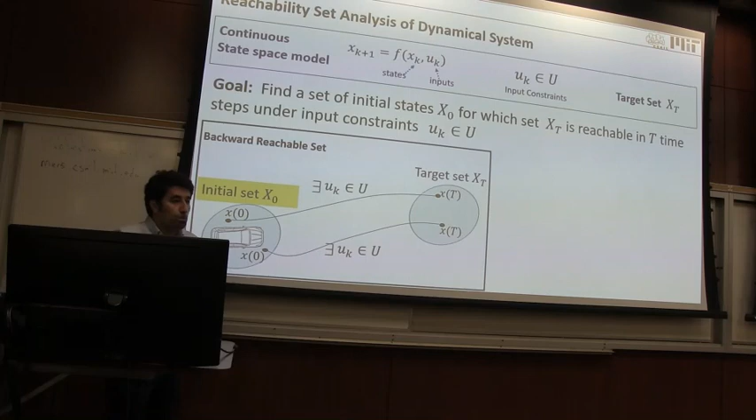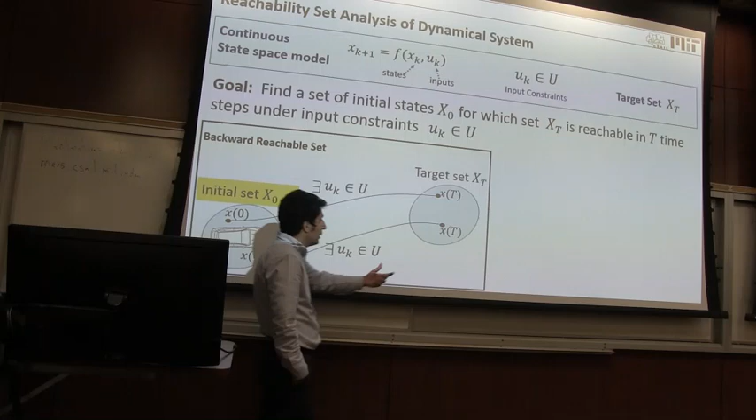So how can we use this backward reachability set to assure safety? So let's assume this target set is an obstacle set that we need to avoid. So to remain safe, we have to remain outside of this set x0, because based on the definition, if we remain outside, there are no controllers to go and hit the obstacles. So that problem becomes infeasible. Or similarly, if this is a destination, to be able to get to this destination, considering the temporal constraints and input constraints, we should always start from this set.

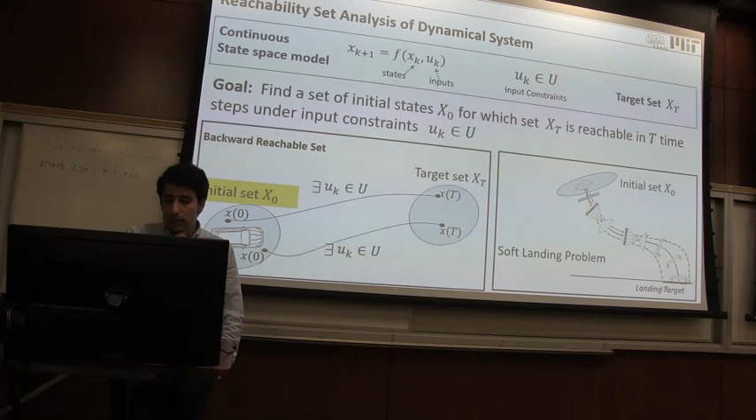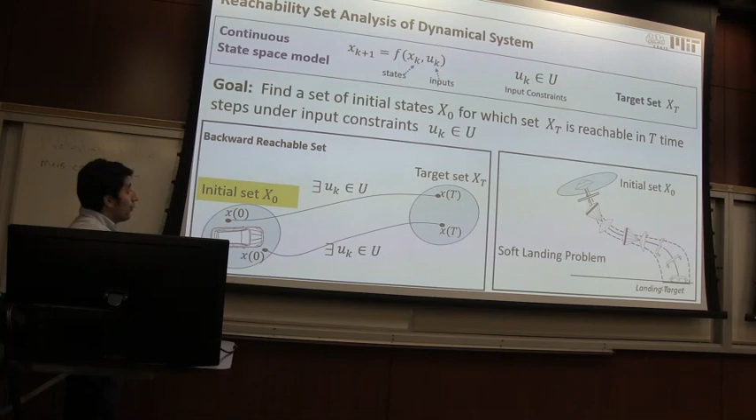This kind of reasoning is in the Mars soft landing problem. In that problem, we are looking for an initial set so that we can land on the target set, given the temporal constraint and the fuel constraints. So this initial set is a backward reachability set of the landing site of the spaceship. Now, this was a definition of reachability set for deterministic systems. Now I'm going to come up with its probabilistic version. So I define chance constraint backward reachability sets.

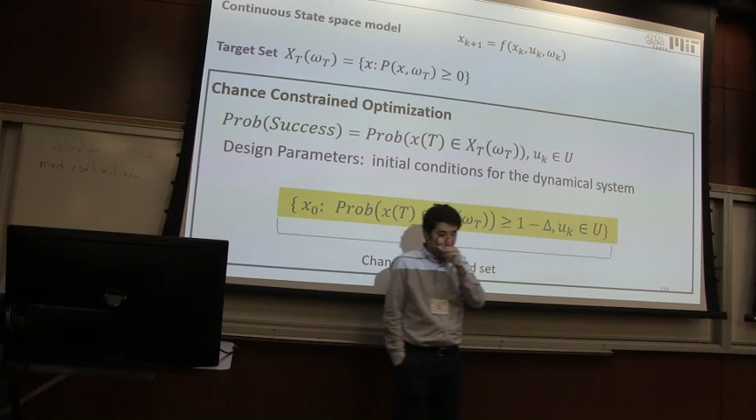So we can reformulate this problem as a chance constraint optimization, where in the chance constraint optimization, the success is defined as reaching the target in t steps, considering the input constraints, and the design parameters are all initial conditions for our dynamics. So this results in this chance constraint, and again we can use semi-definite program results to come up with a polynomial approximation of this set and construct the inner and outer approximation of the reachable sets for safety.

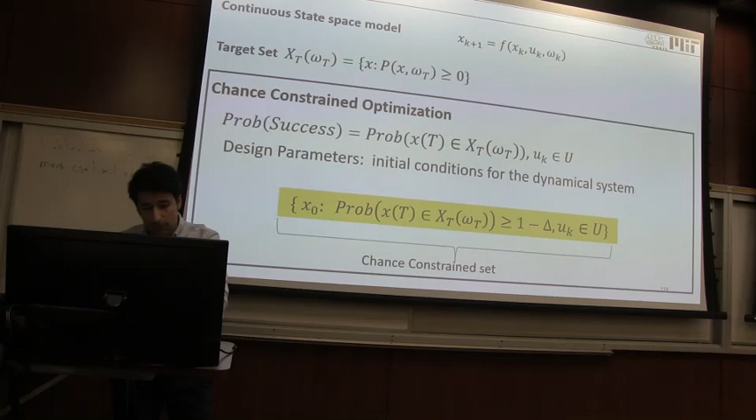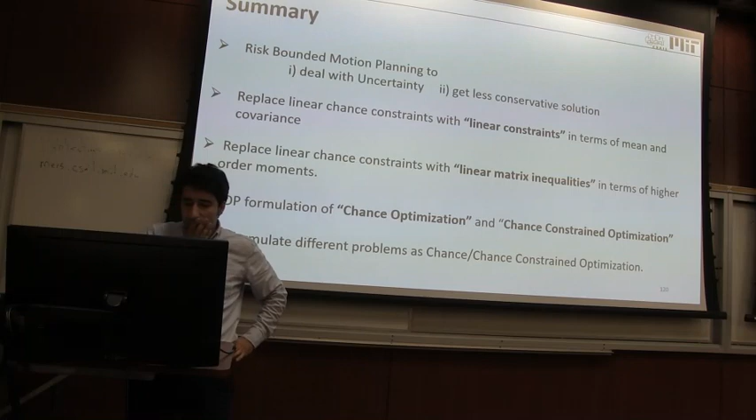Okay, so let's wrap up. In this presentation, I showed that we need to look at risk-bounded techniques to deal with probabilistic uncertainties and also get less conservative solutions. What we did in the case of linear risk-bounded techniques: we modeled the distributions in terms of normal distributions and the mean and covariance, and we replaced the chance constraint with a deterministic linear constraint in terms of mean and covariance.

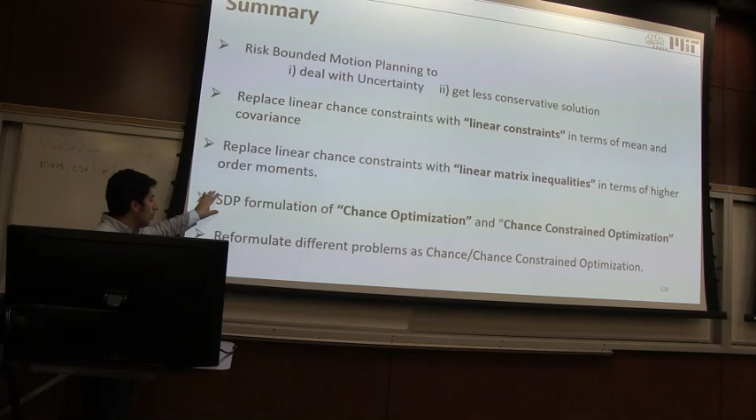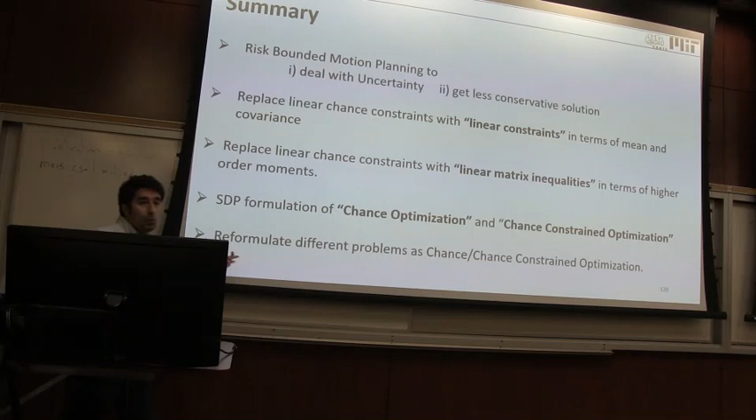And for the nonlinear case, we reformulated the nonlinear chance optimization and chance constraints as semi-definite programs in terms of the moments, and we call efficient convex solvers to solve the obtained SDPs. And I showed that we can reformulate many different problems as a particular case of chance or chance constraint optimization. There are many other details, so please look at our literature. The main results are in our SIAM Journal on Optimization paper, and the applications are in RSS and CDC papers, different applications of chance and chance constraint optimization.

Also, I'm going to teach a course on this topic at MIT this fall. If you check my website, I'm going to put the lecture notes and codes that provide more details on different techniques to deal with uncertainties and risk-bounded techniques. Okay, thank you.

So we have some time for questions. Any questions?

Yeah, I guess one thing I don't really understand is if you propagate according to dynamics, let's say you start with a Gaussian, whatever distribution you have, it'll just disperse, right? For the linear or nonlinear dynamics? Even if the initial distribution is Gaussian, whatever distribution you start with, it should just disperse. Why does it keep concentrating? You don't have perception of anything. So in general, yeah, actually we get expanding funnels. That's true, unless we use some kind of observation to shrink it down. But here you weren't using it. No, I didn't talk about any. So you can't have a really long planning horizon. Yeah.